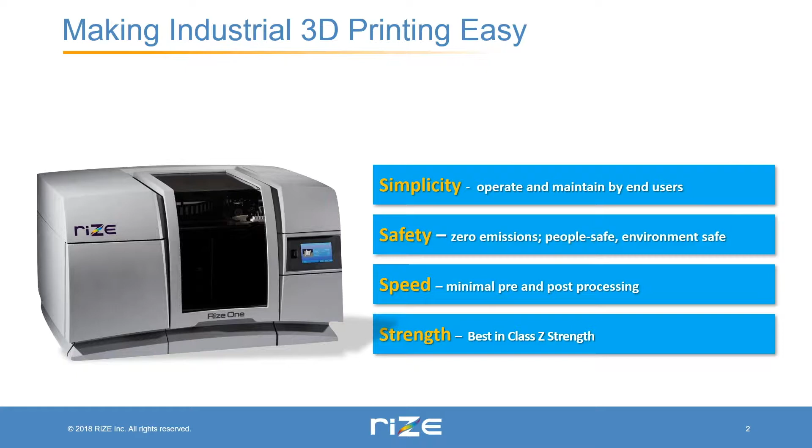You could have a new batch of students in a given semester start to use RIZE effectively in less than 20 minutes, like many of our customers, and do very high quality, reliable 3D printing. And what it also means to schools is this is a printer that runs 24/7 and ready to go.

So we have two products right now. One is Rize One, which is what we call monochrome, into the marketplace. And we recently announced another product, xRize, at Formnext last year. This is what we call an all-in-one printer. It does our Rizium products, carbon and in full color, all-in-one printer. And we will talk a bit more about it.

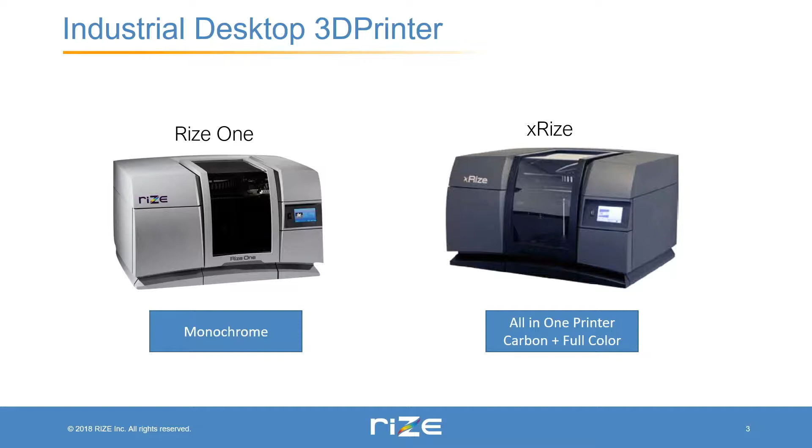And there are many applications for color inside schools and universities. In terms of materials, I think you might be a bit surprised to see inks here. This printer is what we call an augmented deposition printer. You can actually combine inks and release inks and materials all together, the job done.

So basically what we have with RIZE right now is Rizium One, which is a proprietary material, and I will talk a bit more about it, as well as in both white and black, carbon, that we'll be releasing end of this month, early next month. And we also have something called Release 1 ink. What this Release ink does, it actually allows you to peel away the supports, and the marking ink allows you to do full traceability. So these are the different kinds of materials that are used inside RIZE.

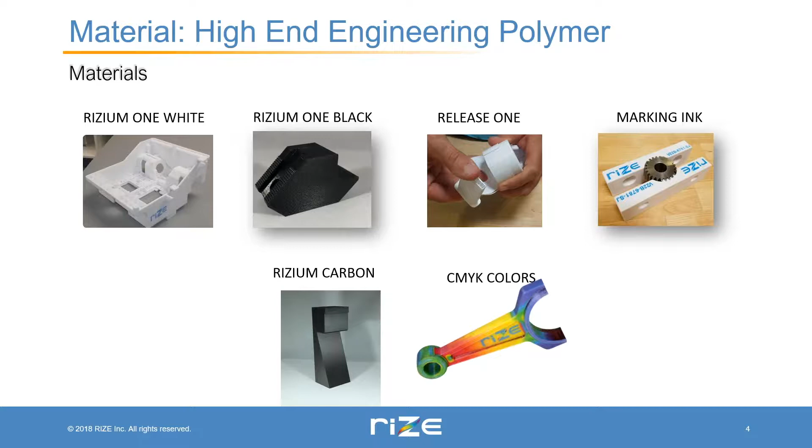And obviously you can see here, once you do a finite element analysis or a CFD analysis, you can actually print it and actually use it as part of the school projects, or any number of things that you can do inside the product.

So the software, and this is another key innovation - just like we have innovated on desktop industrial 3D printing on the hardware, just like we have innovations on the material, now we have innovations on the software. It's unique and purpose-built. It does actually voxel level 3D printing, where it does automatic support generation and support removal with release inks. It applies very intelligently the release inks and marking inks, as well as option for solid and partial fill.

There's a built-in slicer, and it's very easy to use. We have users and customers that, once they have a 3D model done in SolidWorks or any other products, with 3 or 4 clicks they are ready to print.

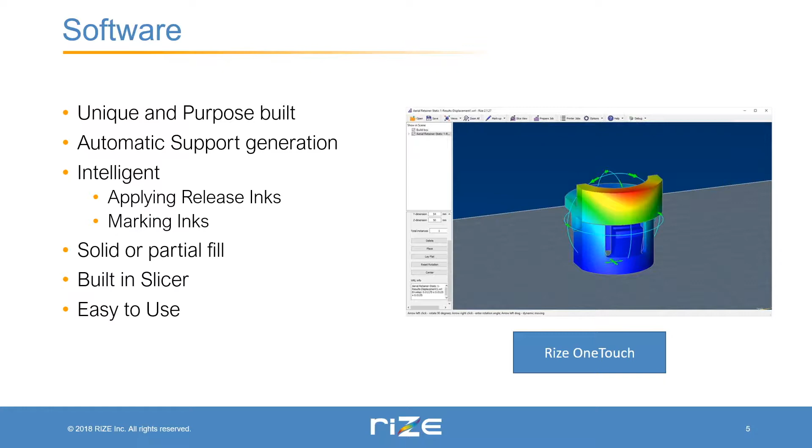Prior to joining RIZE, I joined RIZE last year in early June. Before that, I was VP of Product Management at SolidWorks, been with SolidWorks for 20 plus years. One of the reasons I joined RIZE is the same value proposition on 3D printing that SolidWorks offers on design applications similar to Inventor and many others. So we have innovations on software, hardware, and materials, and I'll talk a bit more about that, and also how we address some of the challenges inside universities.

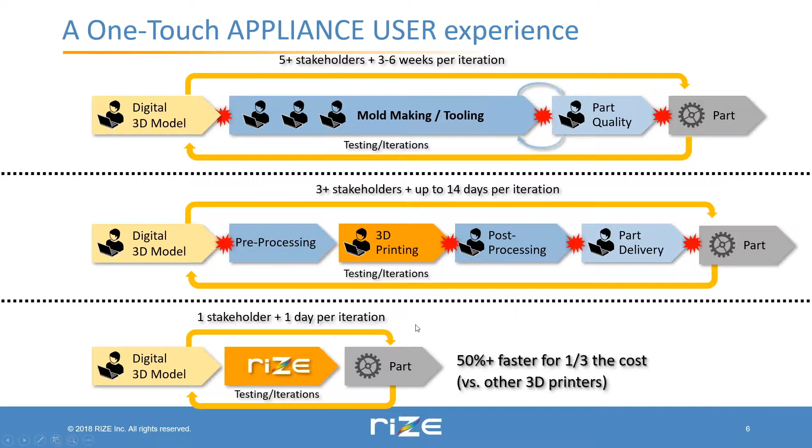RIZE truly is an appliance. It's almost like, in terms of user experience, once you have the digital model that you see at the bottom, going from the digital model to creating the part, time to part, it's incredibly seamless. No barriers at all. Our customers tell us that compared to many other industrial 3D printers in the market, they're able to print 50% plus faster and at 1/3 of the cost versus other 3D printers they use.

One of the key innovations we have is what we call augmented polymer deposition. The way it works, we combined both material extrusion as well as material jetting, which is special inks you can use to do many things inside the product. One is you can put a support layer, and in between the support layer and the part, using material jetting, we put release inks. So the supports come off cleanly, your geometry is precise once you remove the supports. We have very high geometric integrity after the supports are removed.

Our customers do not do any post-process finishing to get the right surface finish once the supports come out. Not only that, with material jetting, we jet at the voxel level inside the part, so you can see all these different shapes, penetrations between the part. We have a printer that's industrial, desktop, incredibly easy to use with full voxel level control and such.

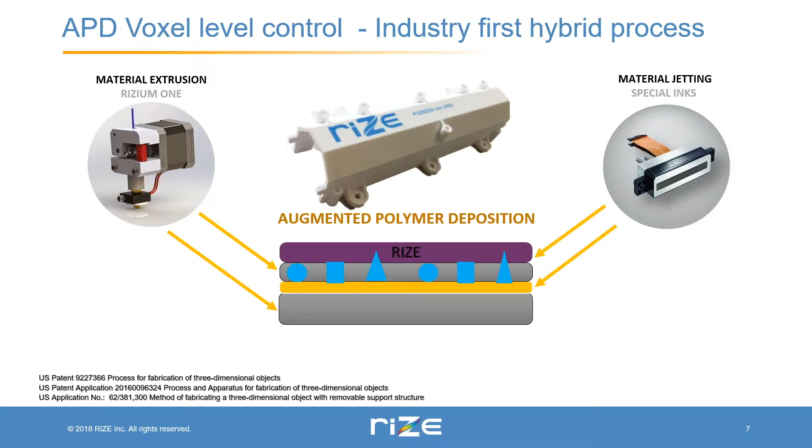We have certain customers under research with us trying to print copper inside plastic parts, biologics, and many other things. So this technology allows you to do research inside universities on some very interesting areas, as well as make it incredibly easy for users, students, professors, and teachers to get their job done.

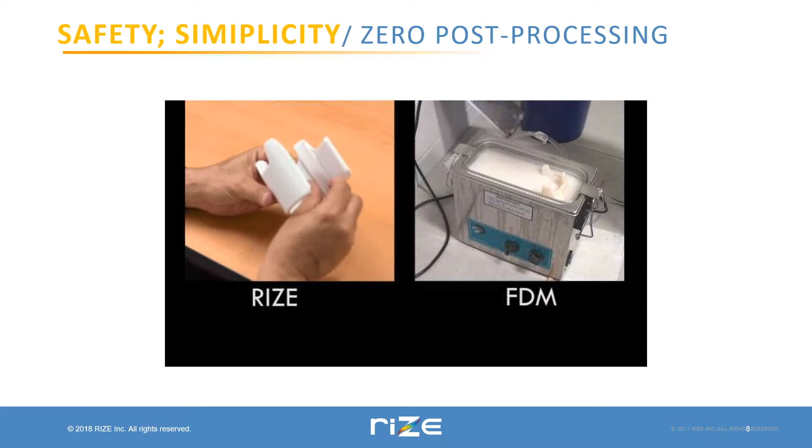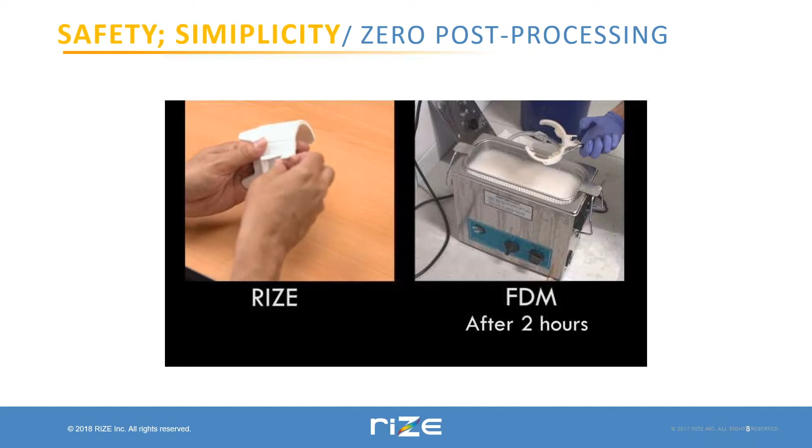Here's one example: on the left-hand side is RIZE, and you can see how the supports are coming off. On the right-hand side is traditional 3D printing. You can see that to remove supports, you just use your hands, because of how we put the release ink in between the part and the support. You can use simple pliers to remove internal supports, and literally in less than a minute, you have a part in hand once it comes out of the 3D printer.

With some FDM printers, it can take up to 3 hours. Because of the releasing, the surface finish is perfect once you remove the supports that come out of the part.

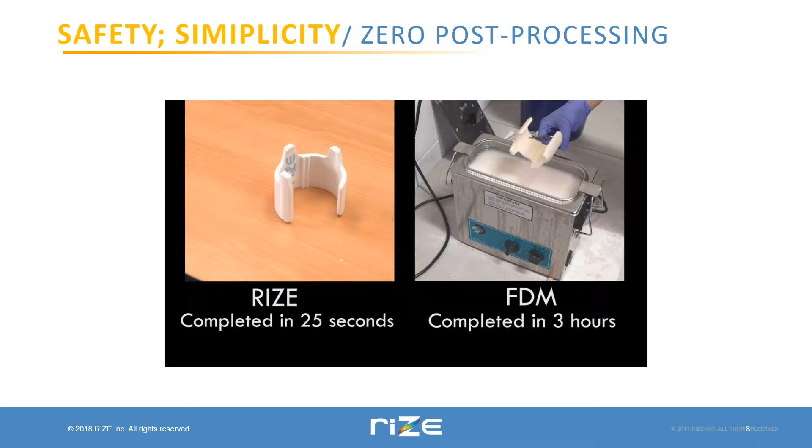Another innovation is material. We actually looked for clean materials in many industries, and we use what we call cycloolefin polymer, which you see on the right in this material table. Internally we call it Rizium 1, but COP, or cycloolefin polymer, is a very high-end engineering polymer used extensively in medical as well as semiconductor industries for its clean properties. We extrude this material at 275 degrees Celsius, and at that time it has zero outgassing and zero emissions that come out of this material.

In fact, there is no mass change as you print this particular material on RIZE 1, and it actually mimics injection-molded strength, because the Z strength is the same as the other two directions as well, so it has very high Z strength, very close to X and Y. It's people safe—the ingredients of COP are USP Class 6 certified. Even though we haven't certified Rizium 1 ourselves, it's made of COP, and we have companies like Merck, ConMed, and other medical companies using Rizium for its chemical resistance.

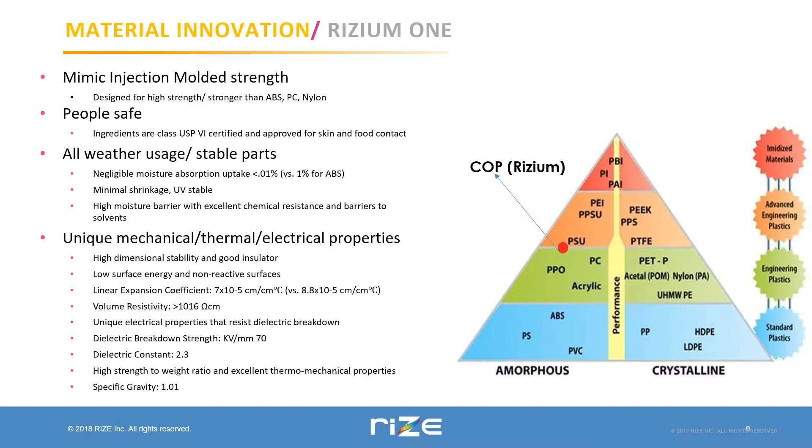I'm not going to go into all those details, but basically what you have is industrial desktop 3D printing with some fantastic material innovations that give you the right strength.

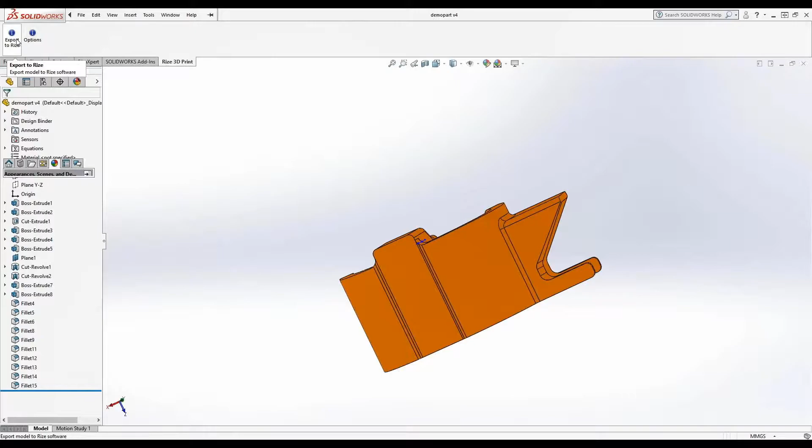The way this printer works is, if you have SolidWorks, or probably many of you do, or Creo or Inventor, from inside SolidWorks you do a very simple click. Once you do that, the part opens inside RIZE One Touch, which is a pre-processing software. Once it comes into RIZE One Touch, you can quickly orient it in any direction that you like. You can center it, and you can add text to it.

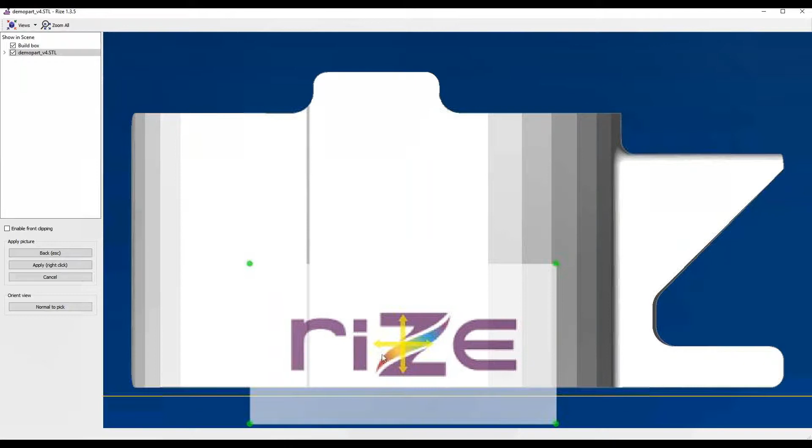So the way you do that is, you can imagine this is a student ID, and a student can put their ID, locate it anywhere. It actually conforms to the geometry, and there it is. You can also put QR codes, for example.

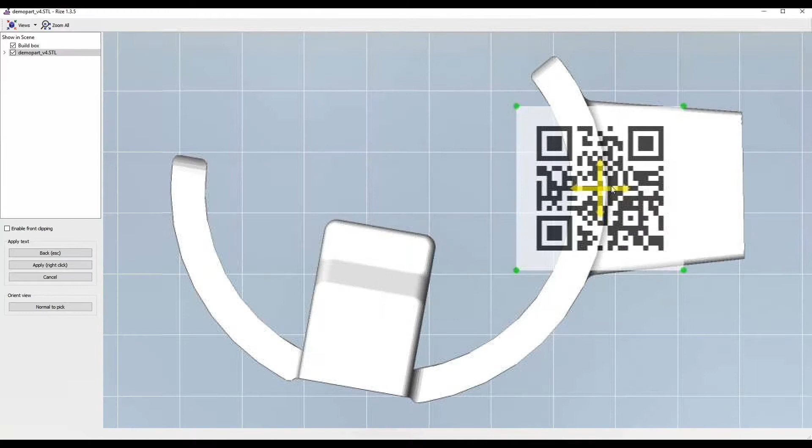If you have a project report, on this particular part you can generate a QR code that connects to the project report on Google Docs or wherever that is. Once you're done, you can tell who made this, when was it made, the student name, project, assignment numbers, and all that stuff. So even for the professor, they can scan the QR code and very quickly know exactly who did it - so you have traceability, authenticity, and all that good stuff.

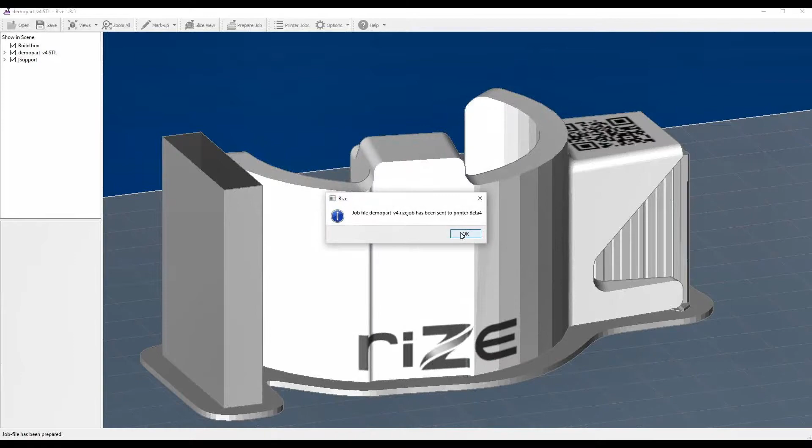Once you're done, you do one click, and it automatically creates all the supports necessary, and you're ready to print. So there's the RIZE 3D printer - it's automatically leveled when it comes from the factory. You never ever level this particular printer.

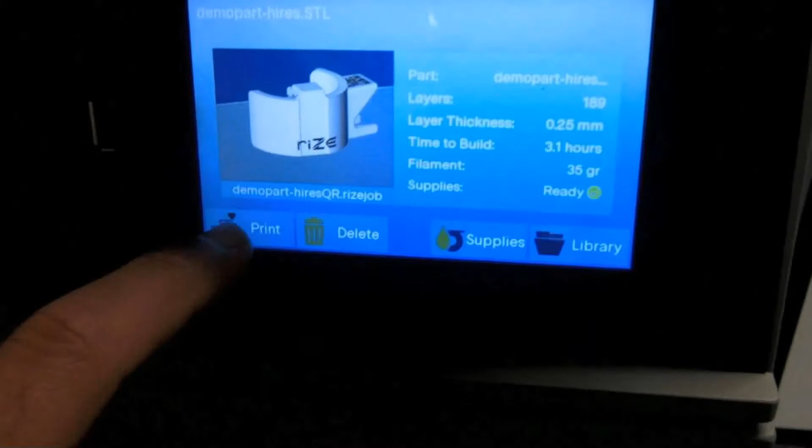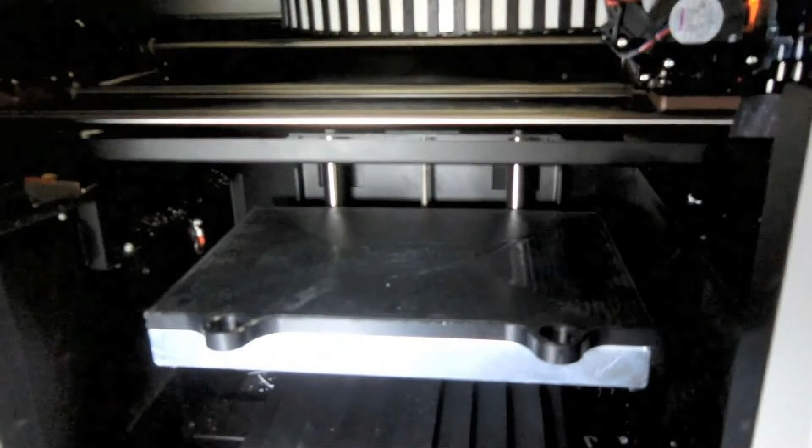Those are all the materials - you can see the two spools of filaments, release inks, and marking inks. You select the part, and at this point you hit print. If there aren't enough supplies, it doesn't allow you to print. The door is automatically locked during the print process. We have some patented technologies on auto leveling and things like that - we do a 6-point check, and after that, it's ready to go.

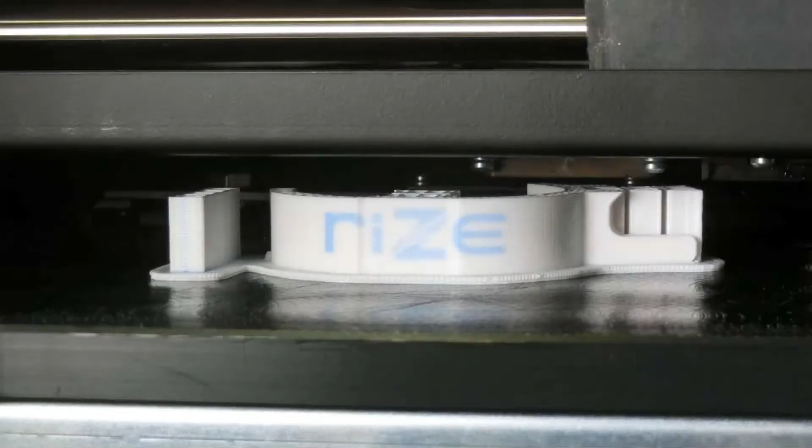You can see on top the print head, which has both extrusion and inkjetting built in. As the part is being printed, you can see the inks that actually show the logo of RIZE right there, as well as once the part is done, there's a QR code and the rest to go.

While you are slicing, you have full control on whether you want a 100% solid part or a partial fill, and you can specify the percentage of partial fill to get the job done. And there's a part with all the supports and the rest.

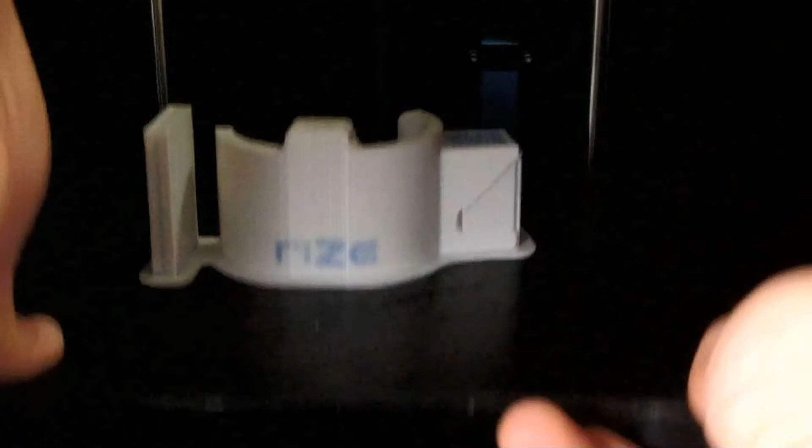The build plate is magnetic, so you just slide it out. And removing supports is what you see here. You can see the surface finish once the supports come out, because there's a release ink that allows easy peel-away of supports from the part.

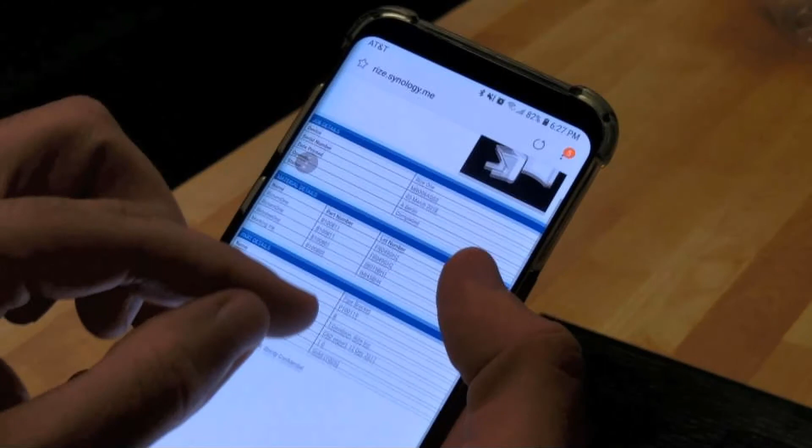A couple more clicks, and in less than 20 you have a part in hand. And I talked to you about the QR code - so now what you do is scan the QR code right there, and it gives you all the metadata that goes with that particular part to get the job done.

The same thing happens with color as well, full color 3D printing. One of the things we do, and a lot of our large customers absolutely love this, is IP protection and what we call digital augmentation. So now you have a digital part where the IP is protected in PLM, ERP, PDM, and MES systems, and once you 3D print it with code, you're all set.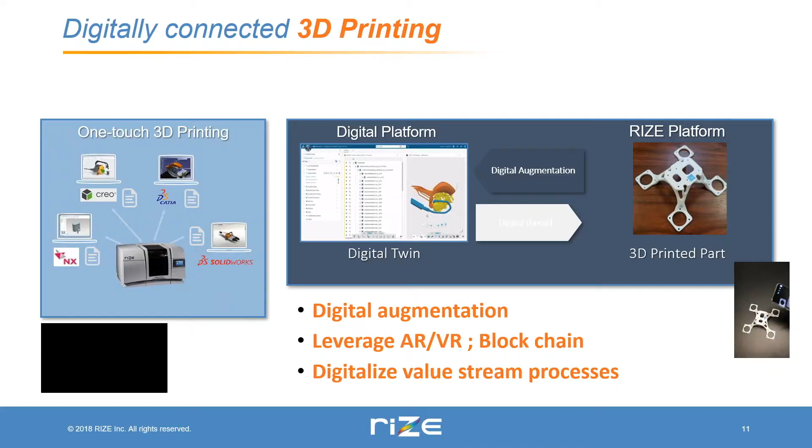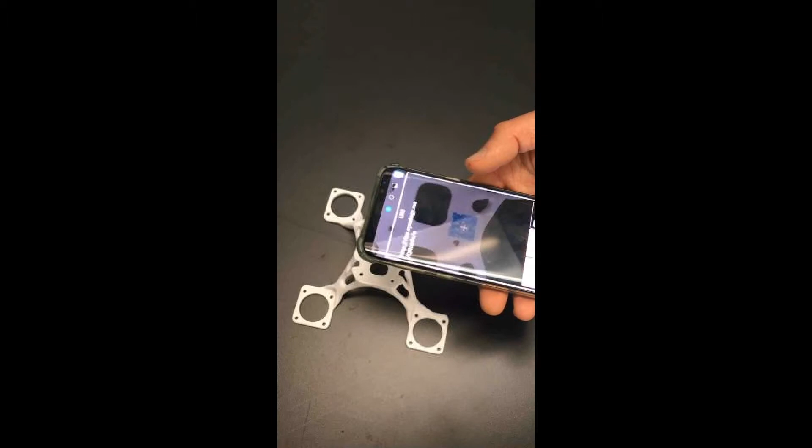You just saw how the print process works, so I'm not going to repeat it. But here is a generative design shape that was done in CATIA. Once it's 3D printed, you can actually have all the connections back to the digital information - the name of the part, the version codes, and everything else.

You can go to our website, rize3d.com, and see the part gallery. Here are some examples of color 3D prints, the topographical maps. Here is an FEA. And if you have architecture or consumer product students in the university, they can actually create exact replicas of the final product in full color and use it for testing feedback and such.

Here's an example of a full carbon part. Here's another example of a carbon part. You can see the post-processing time: 3 minutes for this, less than a minute for this connecting rod, less than a minute for this topographical map, and the same goes for the rest as well.

When we talk about 3D for education, basically a lot of students deal with this: they have pre-processing software that's tedious and complex. We remove all that complexity from the RIZE software when you use it with students, whether they're in high schools, secondary schools, colleges, first year, second year, master's, research - it doesn't matter.

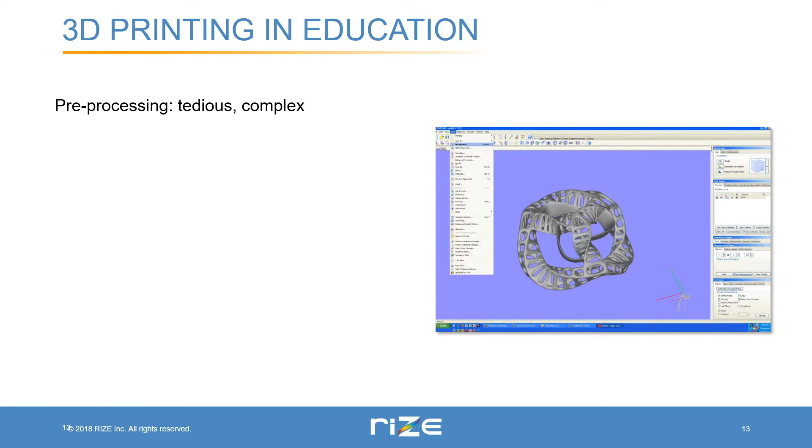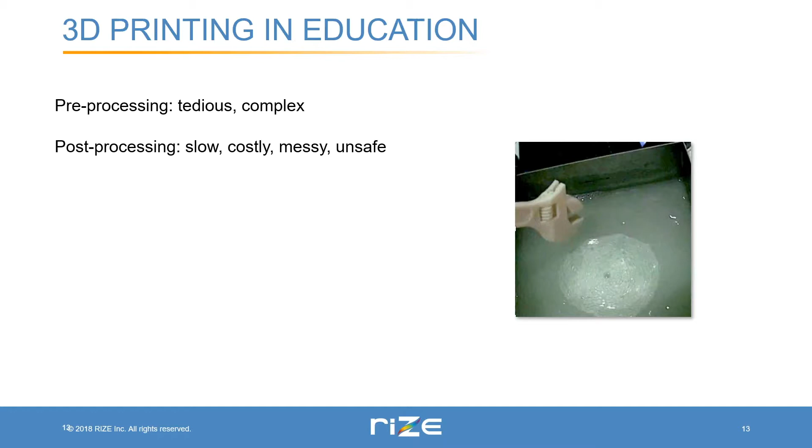The post-processing, we just saw it, is slow, costly, messy, and unsafe with other technologies. You don't have to worry about any of those with RIZE. First of all, there are no emissions, nothing, and the material is proven to be skin safe, at least the core ingredients, so there are no liability issues of any kind for universities.

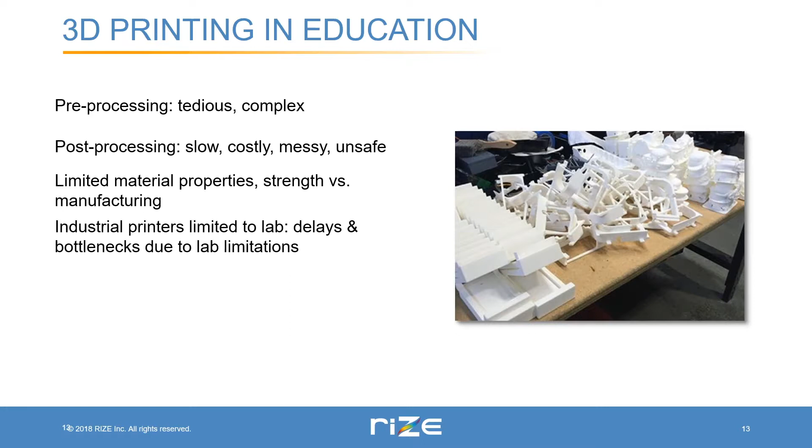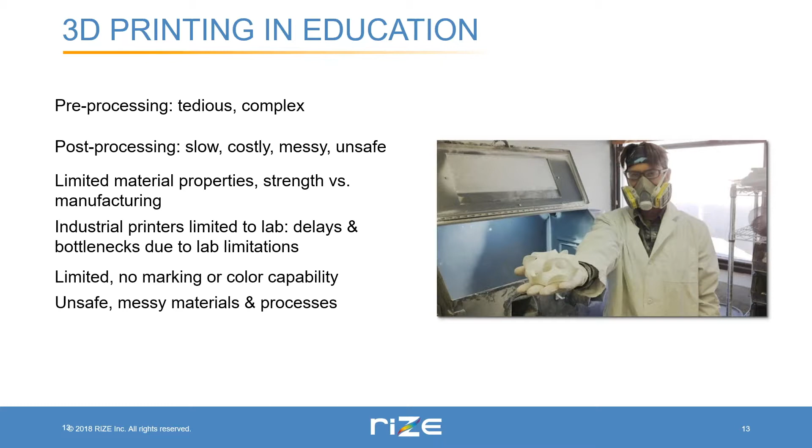We have a perfect combination of material strength and properties, we talked about that. Likewise, when you add this to your lab, you're expanding capabilities and removing bottlenecks for students, with full marking and color capabilities that come with the printer, with safe materials and processes as parts are printed inside RIZE. And it's affordable.

You must have seen, right around Formnext time, Georgia Institute of Technology did a 2-year study on similar technologies of 3D printers, and this extends to powder. Powder is very unsafe and messy when you print, as well as during post-processing. What they found is there are 200+ volatile organic compounds, irritants, and carcinogens that come out of each printer when 3D printing is happening.

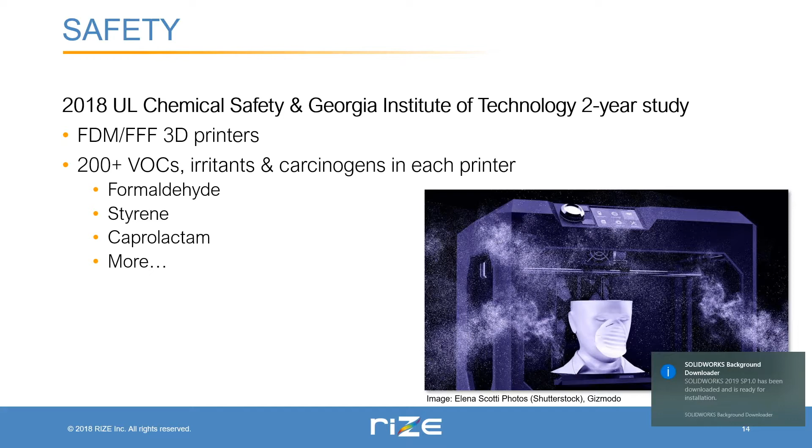And also full traceability, authentication, and color. The world around us is in color. 3D printing needs to be the same. It has to replicate real life, whether you're doing design, whether you're working in different colors.

You can highlight certain dimensions that are critical to manufacturing. You can highlight certain surfaces and include text that talk about surface finish. You can tell critical dimensions for inspection. You can use color for design-to-manufacturing handoff. You can use color for architecture and AEC students. You can use color for finite element analysis, CFD, and such. So the applications are numerous.

And this is an all-in-one printer that allows you to print in Rizium, allows you to print in chopped carbon for strength and toughness, and allows you to print in full color as well.

Students can actually put their unique student IDs for identification purposes, as well as version numbers. A lot of times innovation happens and you have multiple versions of the same design, whether you're doing robotics or Formula One, doesn't matter. You can put version numbers and QR codes that tell when this was built, who built it, and which version it is. Sometimes the dimensional changes are so small it's very hard to tell the difference between one version and another. This allows for digital traceability and authentic parts.

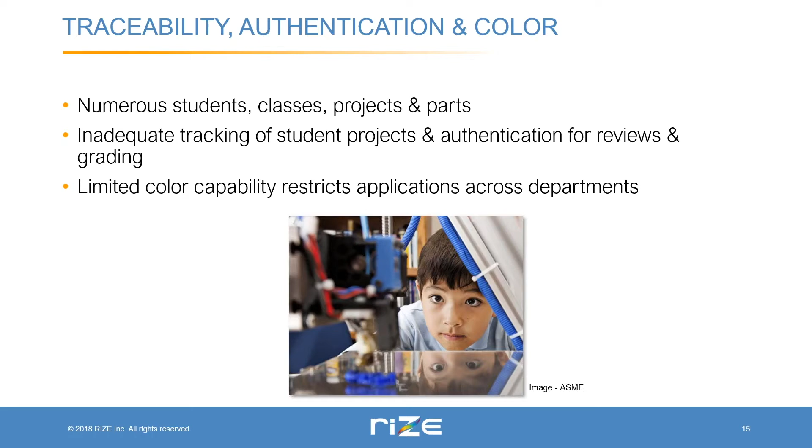So this is a full color 3D printer, a breakthrough. We talked about how this process works. It's safe, people-safe and secure, zero VOCs, medical grade ingredients, skin and food contact safe. It's recyclable print material, and we're incredibly proud that at the end of 2018 we got an award from Frost and Sullivan for best practices in technology innovation in the zero emission polymer material additive manufacturing industry. You can read more about it by going to rize3d.com.

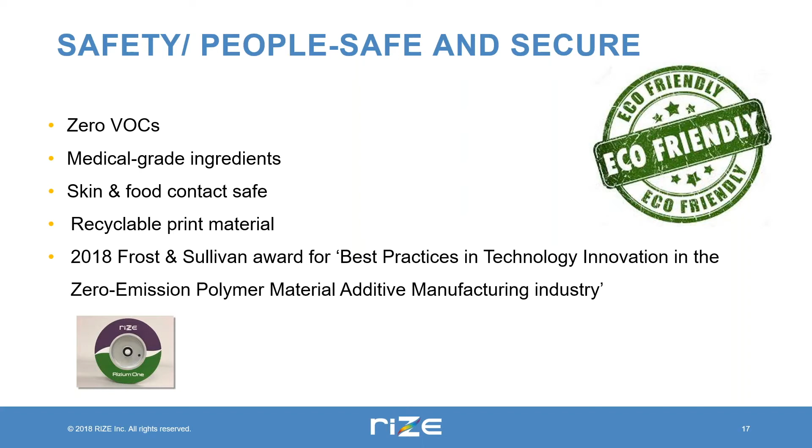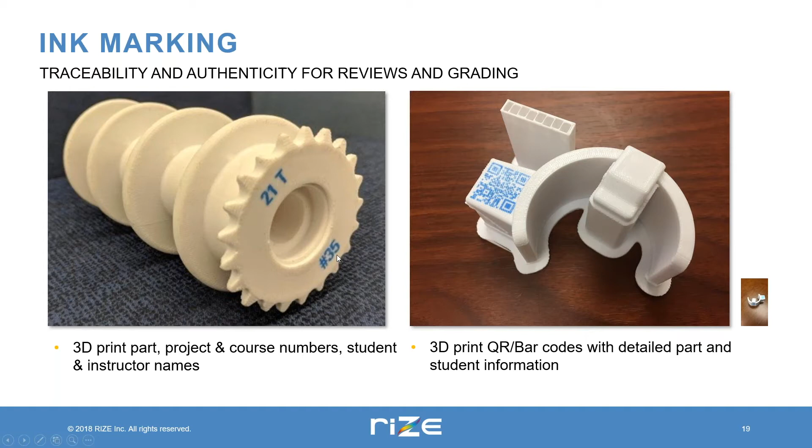As we get closer, it's very easy to use with one-click pre-processing and post-processing, and we have many students who have 3D printed parts like you see here. They actually label the part with the context of it, the number, the team number, QR codes, and all that good stuff. And you can see some of the color parts printed.

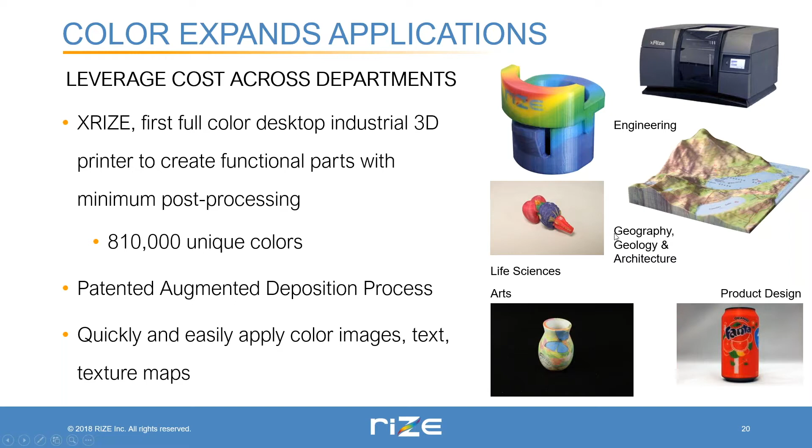This is for a medical application, the brain stem that's showing some cancerous tissue growth, some arts, product design, engineering, geography, architecture, and geology kind of things, with 810,000 unique colors that come out of RIZE.

Here's an example from a first robotics team. They designed an integrated pulley sprocket for the First Power Up competition. They say isotropic, but I wouldn't say isotropic—it's more best-in-class Z strength. There's a small difference in strength in Z compared to X and Y.

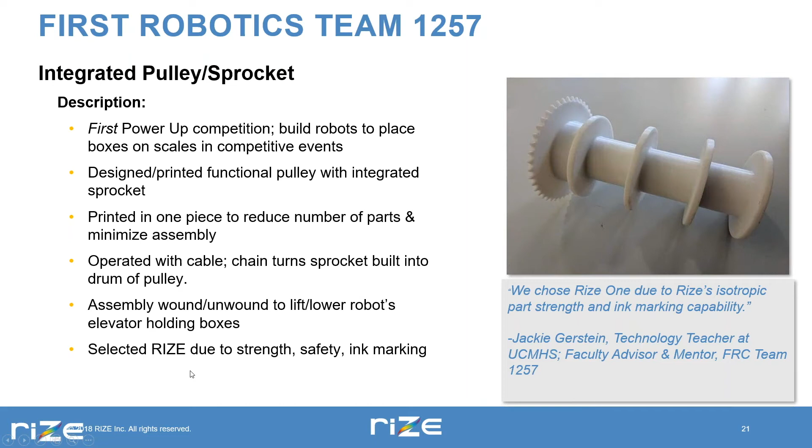And it's printed in one piece, obviously, operated with cable chains, turning sprockets into the drum of the pulley. They selected RIZE because it's twice as strong as ABS, and stronger than polycarbonate and polypropylene.

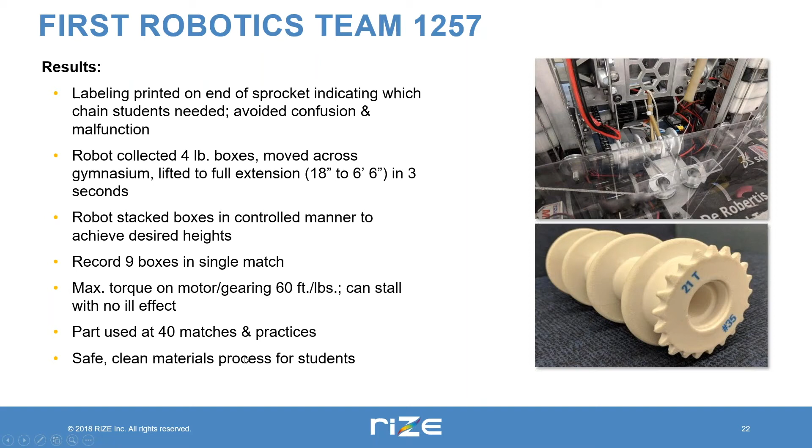And here's where it went on that particular robot for labeling, as you saw. The robot actually collected 4-pound boxes, moved across the gymnasium, and lifted to full extension in 3 seconds. It stacked the boxes, and you can see the part was used for 40 matches and practices. It survived all that as a safe, clean material process for students.